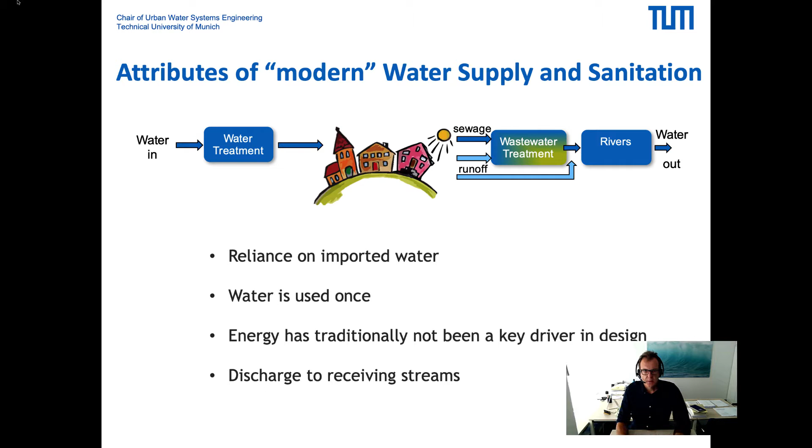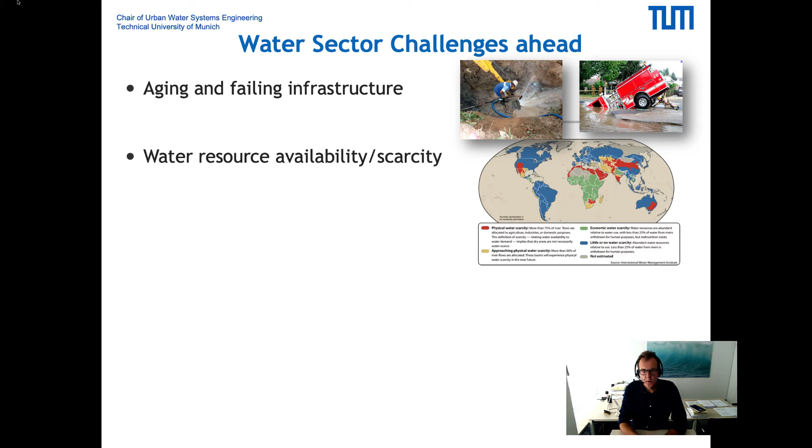Today, the water sector has many challenges. We see an aging and failing infrastructure in a lot of cities that needs to be replaced. We also see, with climate change, huge variability in the water resource availability and even economic or physical scarcity where there's not enough water to supply people and cities. Climate change has a major impact on water availability but also on water quality. And we see dramatic changes, not just in Europe, but worldwide.

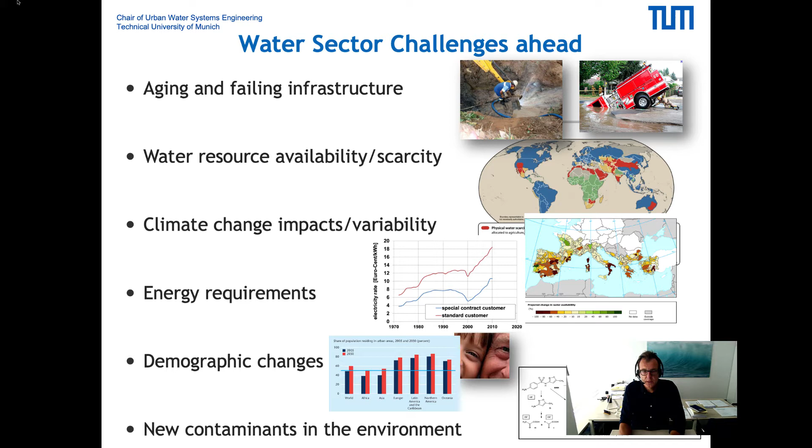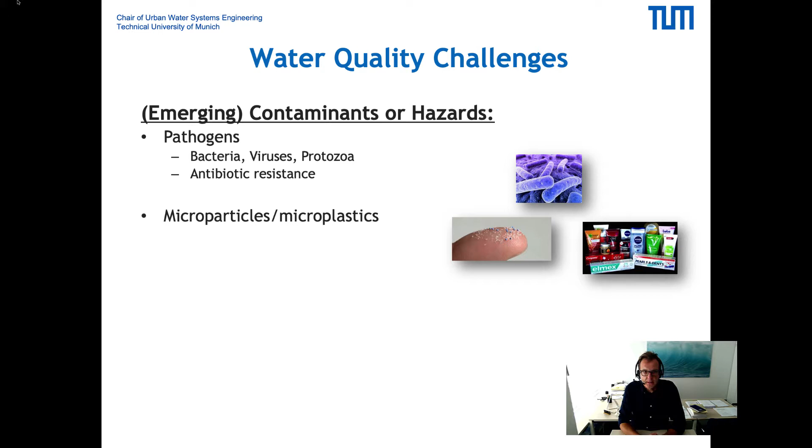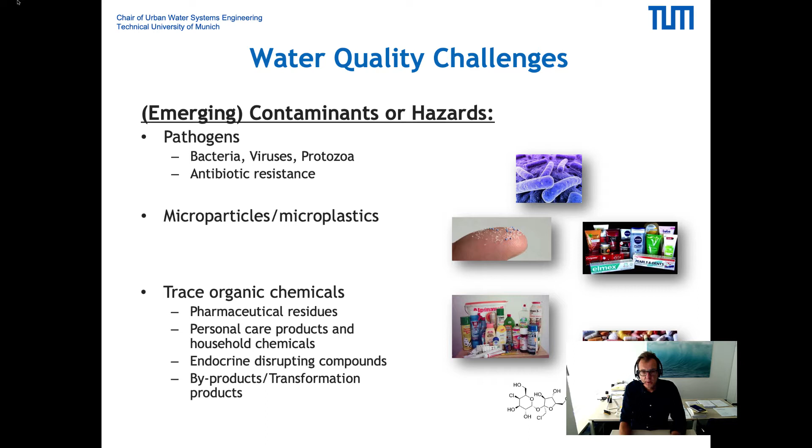And there's a whole gamut of new contaminants we're concerned about, which might affect the water resource availability and safe supplies. Just to name a few. Of course, we're concerned about pathogens primarily. We're talking about viruses every day these days. Antibiotic resistance is on the emerge. But there's also concern about microplastics in the environment and a lot of chemicals we use in our daily routine, such as pharmaceuticals, household chemicals, personal care products, which might end up in the aquatic environment.

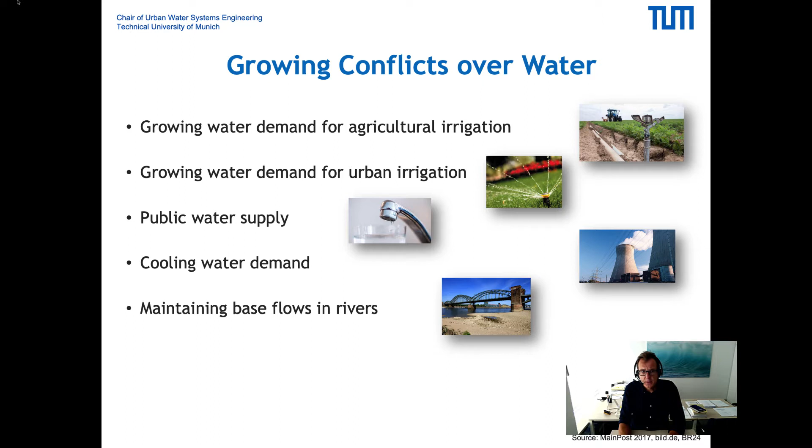With the water scarcity and climate change impacts, we also see a growing conflict over water demand for agriculture, irrigation. The urban irrigation even has some need, and we see some pressure even in Germany. Public water supply, of course, is a key area we need to provide a safe supply for. There's industry, which has a cooling demand for energy production, and we need to maintain ecological base flow in our rivers to protect the aquatic life. And you can certainly also think about for what we use drinking water. Maybe it's not even needed to use drinking water to flush toilets or irrigate our lawn.

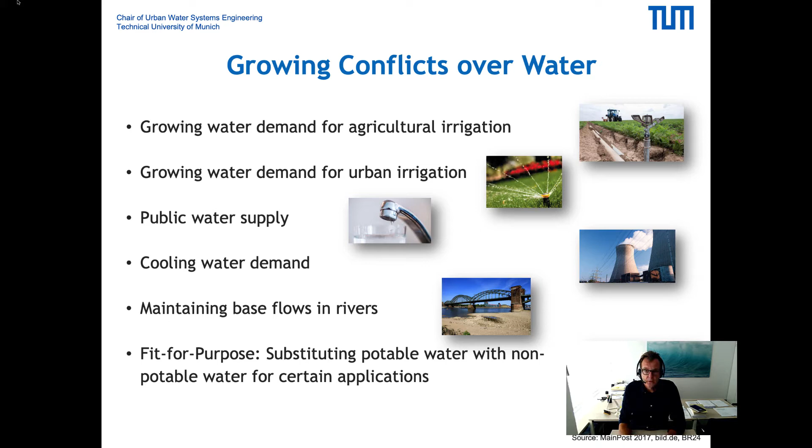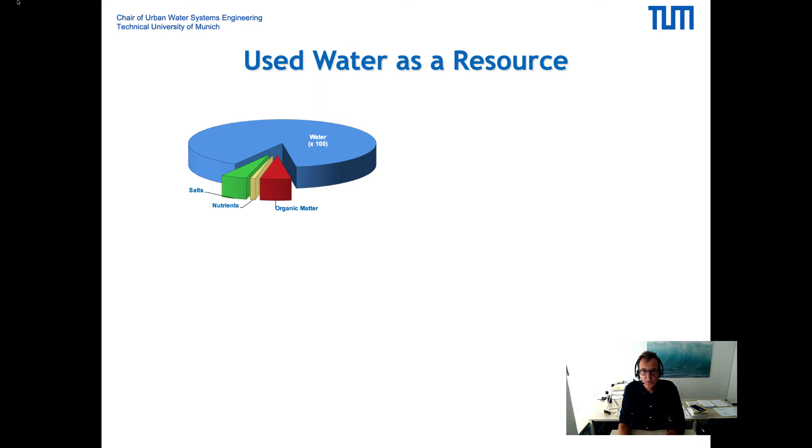There's also increasing recognition given to perceive water as a resource. And you see this little pie chart here that in raw sewage, there's quite a bit of organic matter and nutrients contained. And of course, still H2O, water. So we can recover water, we can recycle water if we treat it up to proper standards that would allow a reuse and a reclamation.

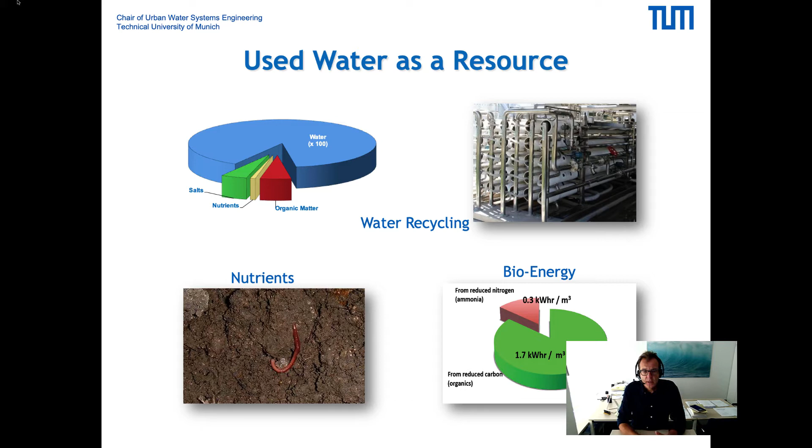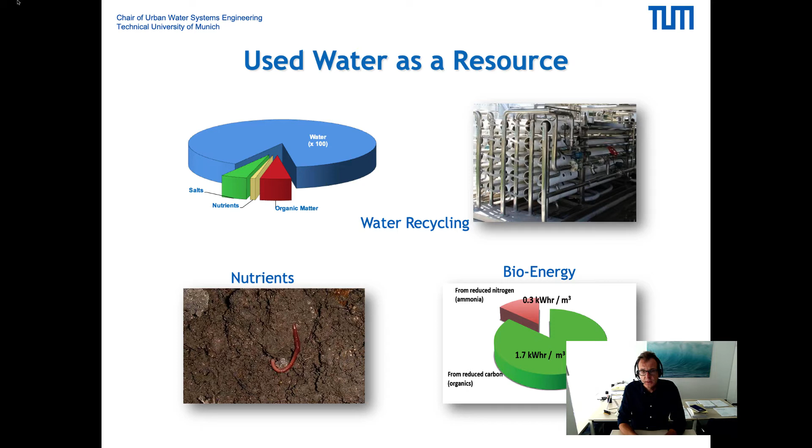The nutrient content is quite significant, and if you manage to recover these nutrients, we can use them as fertilizers, for instance, and the organic matter is actually a major energy carrier. If you can design treatment processes that can recover this energy in the form of biogas, for instance, you can recover more energy than is actually needed to treat wastewater. So a major resource and an opportunity.

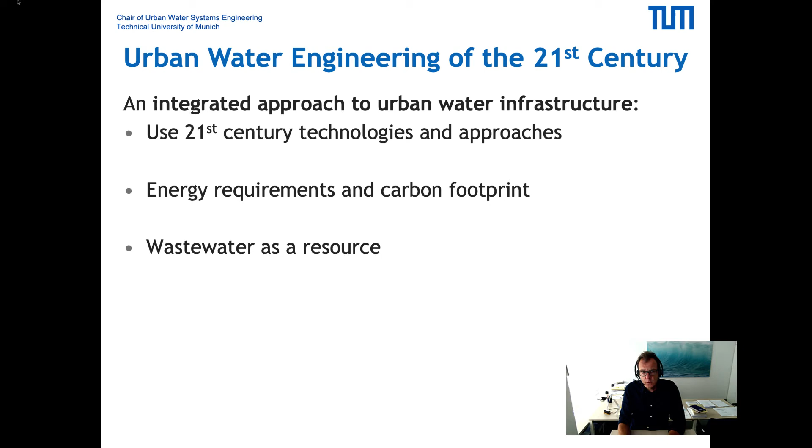Well, this all requires new concepts, and we're looking for integrated approaches to urban water infrastructure, and that's what you will learn in this field of study, using 21st century technologies and approaches, taking into consideration the energy requirements and the carbon footprint of these treatment schemes. Perceiving wastewater as a resource where we can recover energy, recover water, recover nutrients. And we want to integrate natural treatment processes because of their low carbon footprint and no residual generation. So that's a big advantage.

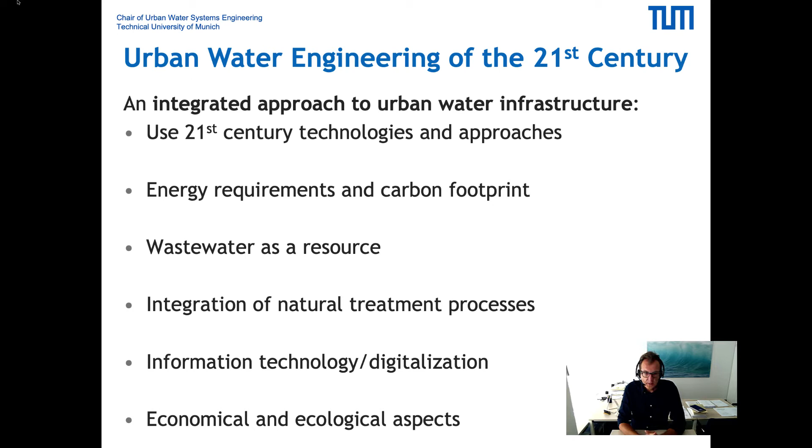Of course, we can take advantage of information technology in the 21st century, and we need to consider also economic and ecological aspects. So this brings us to a more integrated urban water energy management concept, where we see wastewater not as a disposal issue, but as an opportunity to recover resources, to augment local supplies through non-potable and potable reuse, but also to harvest energy from these waste streams, as well as to recover nutrients.

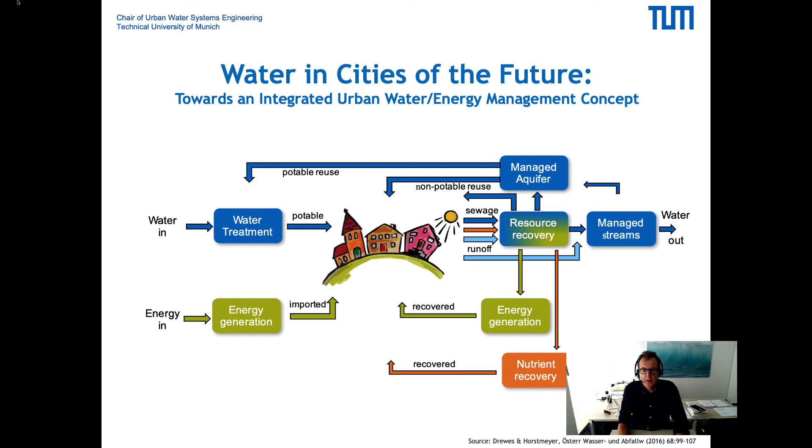And this to protect our aquatic environment. So in order to address these challenges, you need to be prepared to address urban water engineering of the future. And we have set up 2 required courses of 6 ECTS each,

and we'll start in the winter term with the Water and Wastewater Treatment Engineering course, which will give you an introduction to water supply and biological wastewater treatment engineering concepts. In the summer, we have an Advanced Water Treatment and Anaerobic Processes module of 6 ECTS, and this consists of 2 courses, Advanced Water Treatment Engineering and Reuse, where you learn more about advanced treatment concepts and the opportunity to recover water and reuse it again.

And the second course will deal with anaerobic processes and energy recovery, to see this as an opportunity to generate energy from waste streams. So to further broaden your expertise in this field of study, we put together a catalog of really interesting electives. You can gain further knowledge about industrial wastewater treatment and reuse opportunities. We will offer a course that is dealing with engineered natural treatment systems, wetlands, biofiltration concepts, which have a low carbon footprint to treat water in any settings, even in settings with very limited resources, for instance.

We want to teach you some aspects of modeling of water quality in an aquatic system. So that's a modeling block course we offer. Hydrochemistry, water chemistry is very important to understand the design of treatment processes, but also to assess water quality problems. So you learn this in a lecture, and you have an opportunity to also take a laboratory at our chair to learn some hands-on techniques yourself.

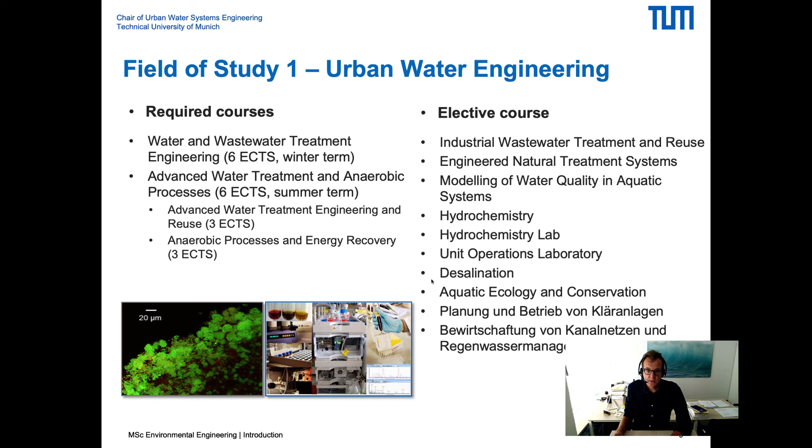Professor Würzbacher is heading the microbial systems group, where you look at microbial systems, pathogens, antibiotic resistance, but also using biomolecular tools and genetic tools to understand the function and the structure of biological systems, which are key to understand the function of natural systems, but also engineered biological systems.

And we have a laboratory that is dealing with trace organic contaminants in the environment, which is headed by Dr. Knob. And here you learn the fate and transport and relevance of trace organic chemicals in the environment, in water, and treatment options which might exist to remove them. And last but not least, Professor Gondhalekar is heading the Water Energy Food Nexus Group, where you approach this in an integrated fashion from a planning perspective to bring together these elements in different settings.